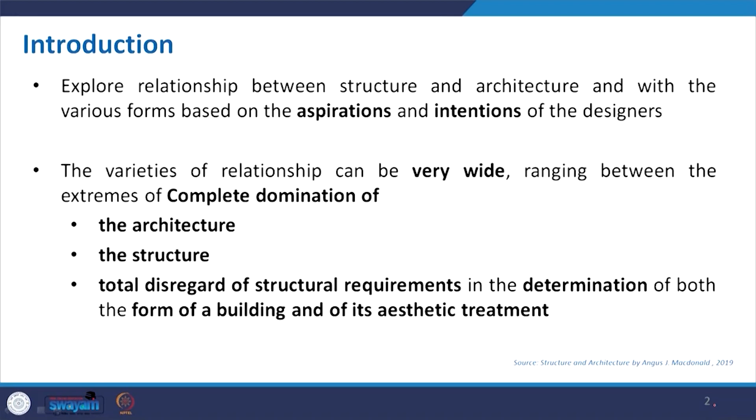So in this lecture we will explore the relationship between structure and architecture, and our focus will be on the aspiration and intention of the designer. For example, as a designer I design a building where I want to show some art form, which will definitely be supported by the structure, but I will not really bother with the structural requirement or structural arrangement to optimize it. So sometimes we just ignore the structural constraint.

With the advancement of technology and different materials, nowadays it is possible to go beyond a traditional, orthodox, structurally fitted design. Say we moved from frame structure to different shell structures and all. So it depends on the designer or architect who will design the building, looking at the concept, quality, or overall form to be created, whether structure will take predominance or sometimes not.

And sometimes with the traditional orthodox beam-column structure we may feel bored, so we go for making some twist or making that structure a little bit interesting. In this particular lecture we will see those kinds of things. The varieties of relationship range from complete domination of the architecture, where architectural form, imagination and creativity will come into

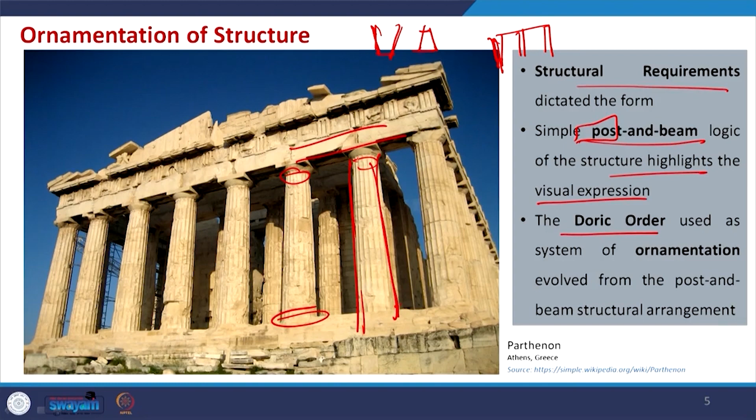So, this has been created to correct the visual error. If you make your structure a little bit tapered, you will have something different. So, here they have made some correction. In history this has been covered extensively. So, in the Doric column, the feature is that near the top and the capital there is some reduction, and you have a capital like this.

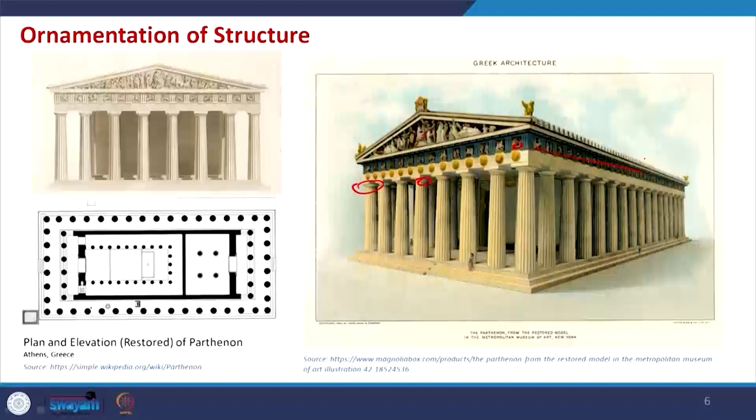So, this has been in practice in Greek architecture. Apart from the Parthenon, there are many such buildings where these have been used. Now, for the decoration, let's look into the history. So, here are different types of columns or posts being used.

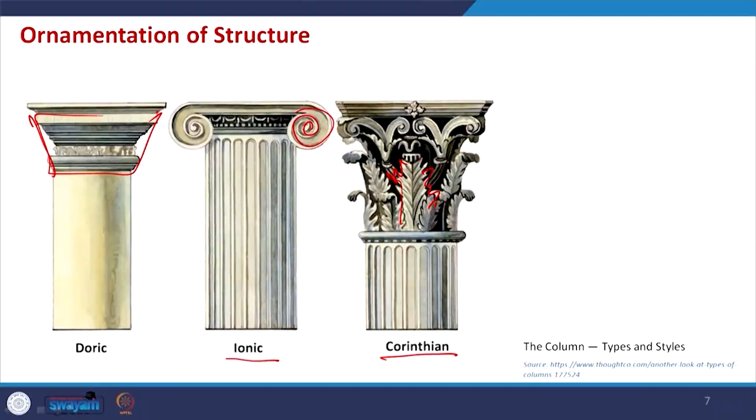The Doric order, which was used in the Parthenon, you can see how the capital is made. It is very simple, staggered, with some minimal ornamentation. When we come to Ionic, the capital will have some involute to create a wave-like form, and when it is Corinthian, it is more curving, giving an organic look like leaves, more than the column itself.

So the basic structure is again a post or column, but now with carvings and such, it is basically some ornamentation which adds value to the structure.

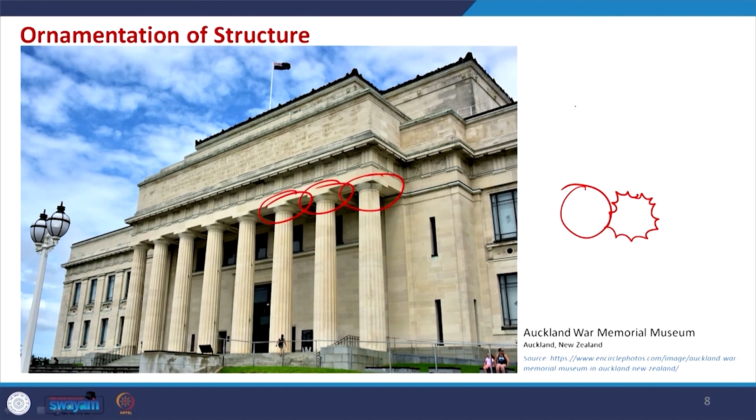This is another example where the Doric column is used, the Auckland War Memorial Museum. You can easily identify these things. These are basically cylindrical posts or pillars, but having these cross sections - not exactly circular. If you draw it correctly, you will get this kind of cross section, and at the top the capital is designed in a different manner. It is not a plain beam column that we normally use for frame structures.

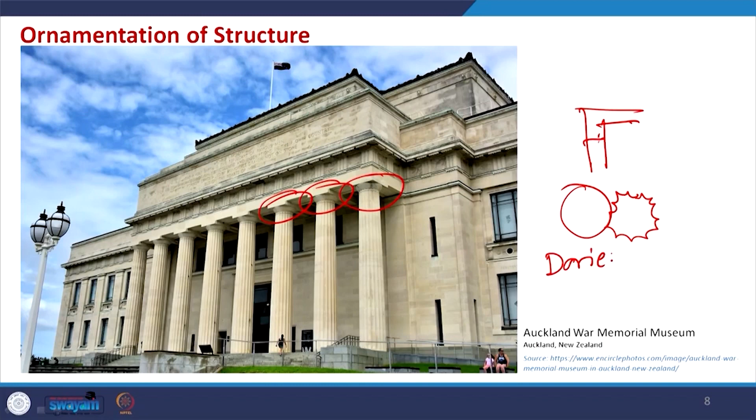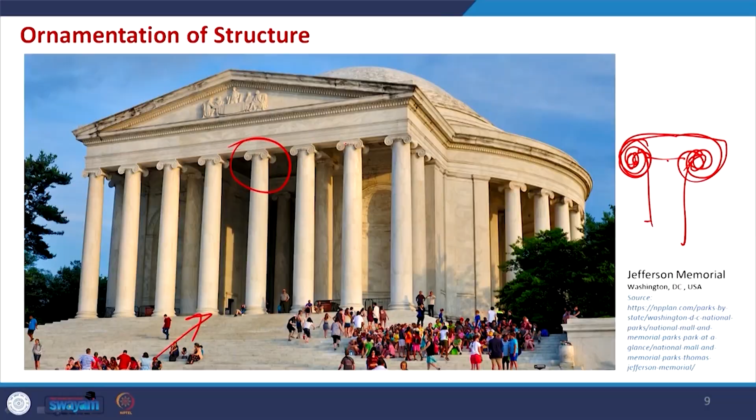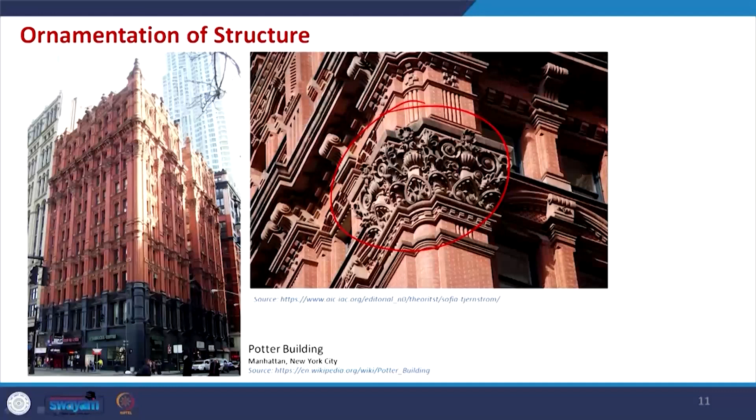Moving on to this building, the Potter Building in New York. Here also there is this beautiful curvature being made. This ornamentation is a mix of many styles. This is a corner portion, and even the arches, everything has some extra ornamentation, and that is what makes this building a little bit different - it gives a terracotta look to the whole structure. Again you see the combination, basically adding some ornament to the basic structure. This is another example of this category, ornament of structure.

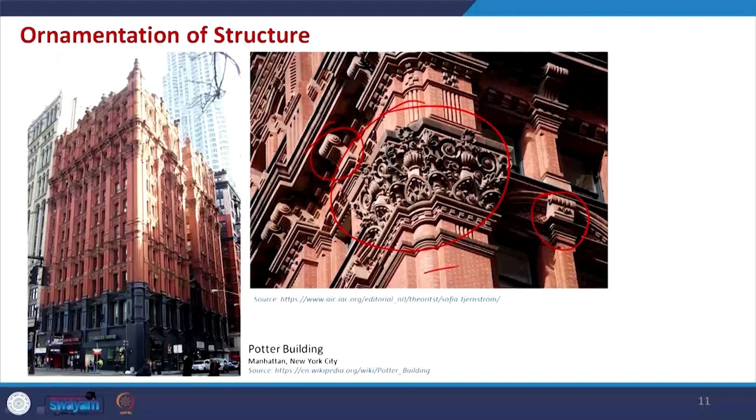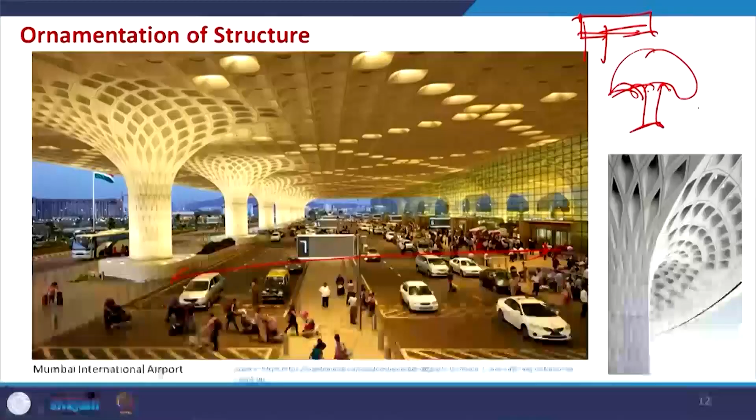It could be a simple cylindrical column, normally seen in flyovers or elevated roads, the metro, elevated metro corridor, where you have cylindrical or cuboidal piers, and on top you have the corridor or flyover. But this section can be improved like this, where we can ornament it. It maintains the proper geometry, but the final outcome, looking at it, is not a simple column-slab combination, rather it has some additional ornamentation to that combination.

So this is a modern example of that, and it is from Mumbai International Airport, which we have already discussed in some of the earlier presentations.

So, before we move to this particular next category, let us clear this out.

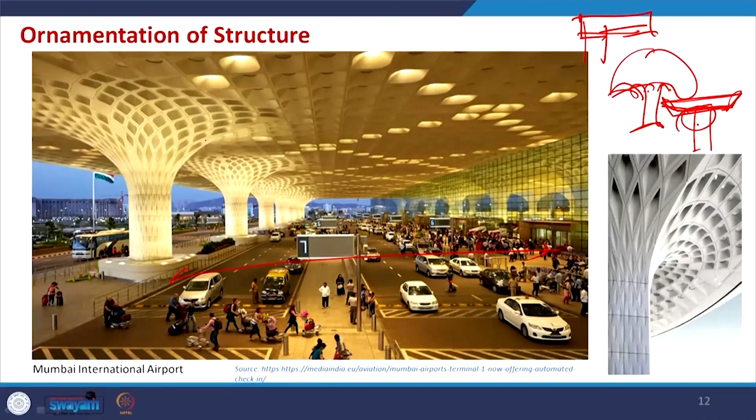What is the basic concept to put a building in this category? Looking at the building, we simplify it as just a structure, a typical post or beam-column structure, where space is created by the arrangement of these beams and columns. This is the fundamental. Now, in addition to that, we add some ornament following a style, sometimes a combination, like in Greek and Roman architecture with Doric and later Corinthian orders, and then a mix of these. That made the very simplistic beam and column into a piece of ornament. So that is basically the ornamentation.

Along with some historic examples, I have also shown some modern examples, so it is clear that this is still in practice nowadays. These are just a few ornamentations I have shown, but you can explore more, and I want you to do that—go through different buildings and analyze how much ornamentation has been done, and whether that building can be put in this category. We will discuss this further in time to come.

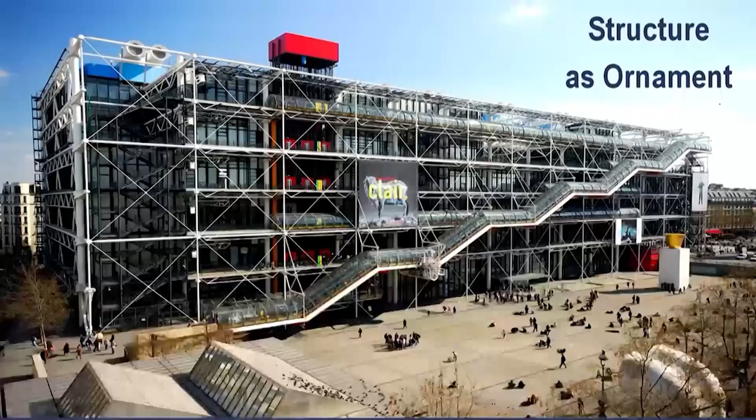Now, let's move to the next topic for this lecture: structure as ornament. Here we have to be very careful. Earlier it was ornamentation of structure, now it is structure as ornament. That means in this category we learn about buildings where a structure itself acts as an ornament to the space creation.

Now how is this different from the last one, ornamentation of structure? There, the basic structural requirement is fulfilled, and then we add decoration to it. Here, the basic function is met with a basic structure, and then some structural arrangement is put into the building which acts as ornament. So the structure itself acts as ornament.

In this building, you can see it's basically showing all the services—there is cross bracing, some tube structures, an escalator, and cantilevers. Everything together creates an impression of structural arrangement. So here, the structure acts as ornament to this building, which is a very simple rectangular building, but this adds value to it.

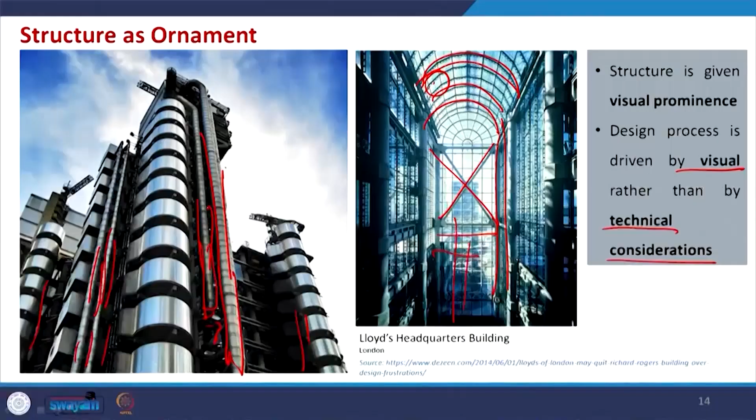So, the design process is driven by visual rather than technical consideration in this category. We have to understand what that means—technical consideration could simply be, if I redesign the building using a similar example, to just fulfill the functions with slab and beam-column. But here, the structure should be visually pleasant, with emphasis given on the visual rather than the technical. That's why all these structural elements act to make the building more beautiful—placed as beautification elements, or as ornament.

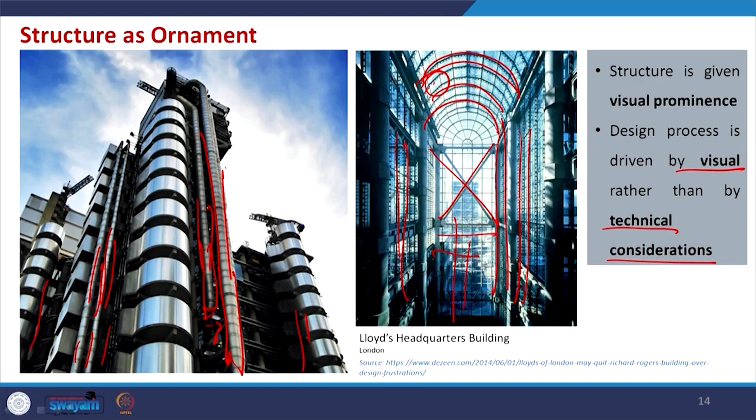So, moving to the interior view of the same building—here you can see all these circular columns and the beams, everything acting as ornament. Here's another picture where you can easily see all these services and pipes externally placed, which add value as ornament.

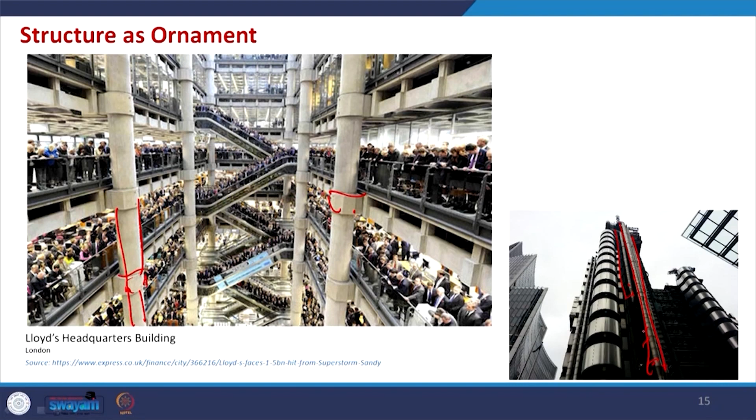Basically this is a vertical service being placed outside, decorated and covered with some transparent material. These portions are supported with cantilevers and other things, and these are visible. It's not that one could not hide it from the viewer, but rather the architect wanted this exposed so people can easily understand the type of structure being used, and it is so beautifully placed in order with some rhythm, so that the structure itself acts as ornament.

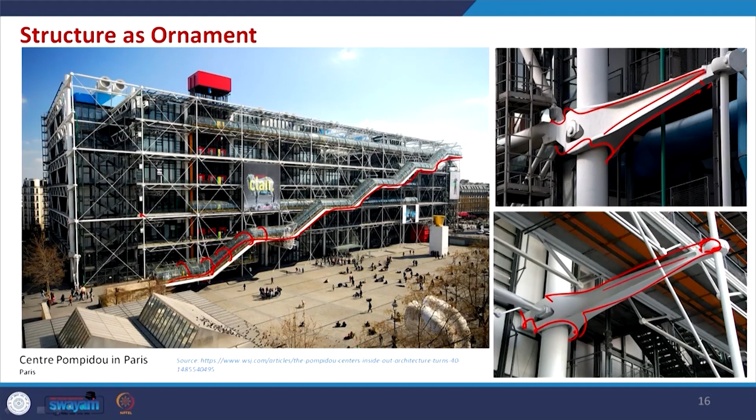But studies say instead of making all these cantilever structures, if you used a simpler one, you could save more than 25% of the structural elements. That means this was not the constant requirement - they made this building a piece of structural arrangement and added beautification for each and every corner. All these joints are beautifully placed, maintaining some rhythm, so that this building comes up as an example under the structure as ornament category.

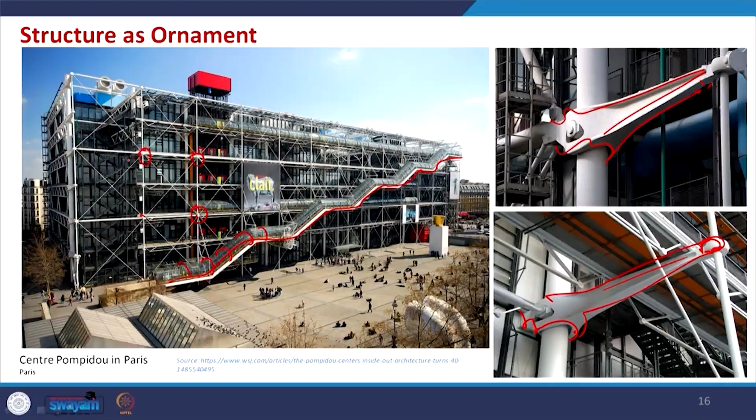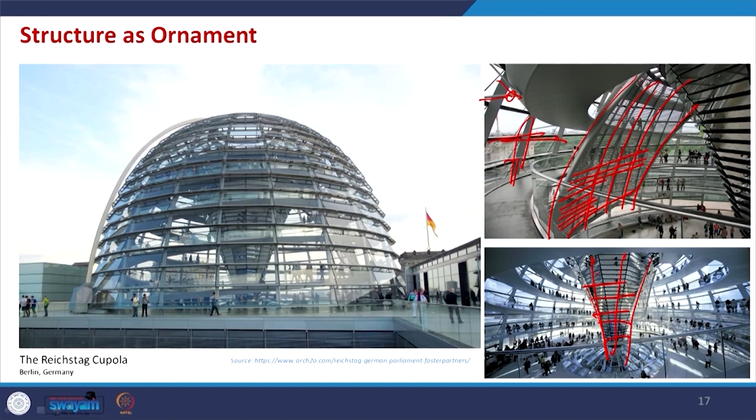Basically that adds some value to this spherical architecture. It could have been designed with some other technique, like a shell structure or something, but here it is designed in this category. Structure is used very predominantly here - the dominance of structure acts as ornament, adding value. It could have been a very straightforward design, but here, to make it aesthetically pleasant, some neat finishes and a combination of different structures were made. This is very important to know - this kind of relationship where we connect structure to the building as ornament.

So connecting structure with architecture - this is the second category. Now we come to the end of this presentation. We have discussed ornamentation of structure and structure as ornament. Though both have similar words, just combined differently here and there, we got to know how to distinguish them. So again, a quick recap: the first category is ornamentation of structure, and the other is structure as ornament. What exactly does that mean? Ornamentation of structure means structure is the basis that dictates everything.

Let me try to make one building as an example. These are beams and these dots are like columns, and we make the elevation - that's the beam - and then you have this structure, maybe a shelter or something. But this is a very simple structure-driven design, there's nothing to play with in terms of other form. But now instead of this, I replace this arrangement - the beam is there, and then we ornament it with some different structural element, give it some other look, or maybe decorate the columns and other things, giving a classical look to it. Depending on the need, we can do this. So the basic fundamental is that structure dictates the form, and we ornament it with decoration.